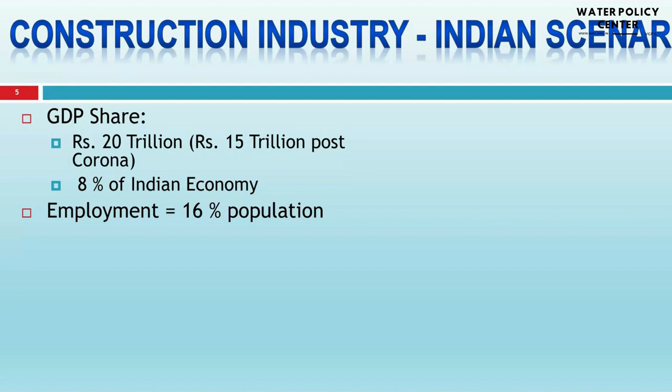But this amount may also change in future, and it is about 8% of the Indian economy. It provides employment to 16% of the population, and it is the biggest job generator next to the agriculture sector.

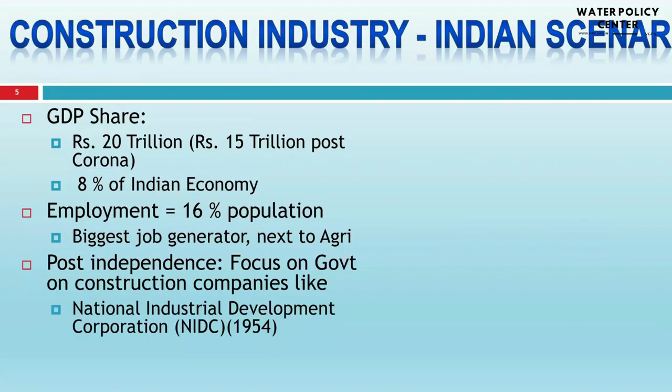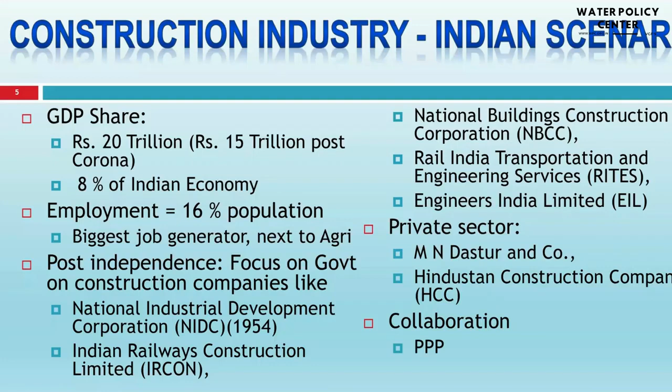There are many incidences in the development of our country, like government set up undertakings and national companies, and there are many private sectors working in this field. There is also a collaboration sector, PPP and BOT, which is a mix of government and private sector.

In this slide, I will briefly discuss the major impacts of COVID-19 on the construction industry. The first major impact faced is a reduction in demand, due to the lack of purchasing power of customers.

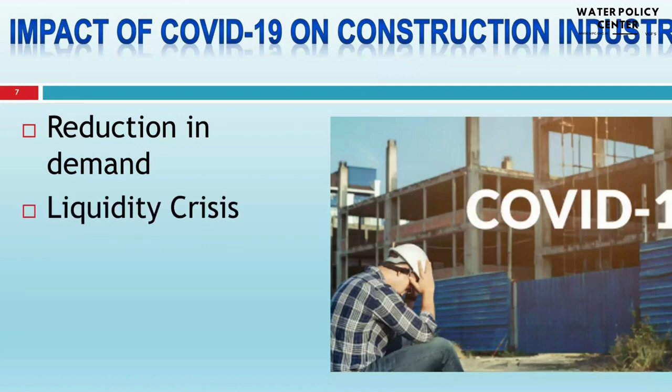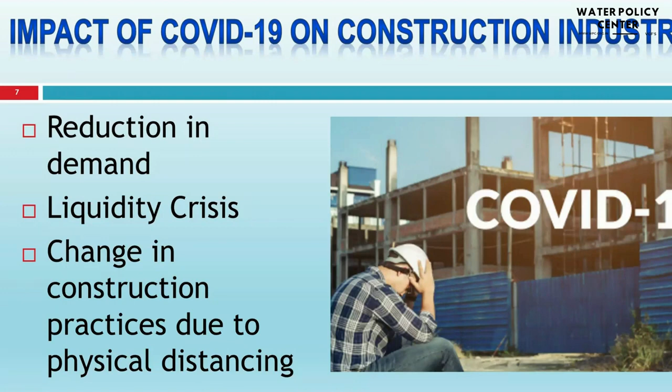Then there is a liquidity crisis, from bank financers to the contractor and the developer. Then there is a change in construction practice due to physical distancing, as many organizations started home working practices, which brought a huge impact on the working of this industry.

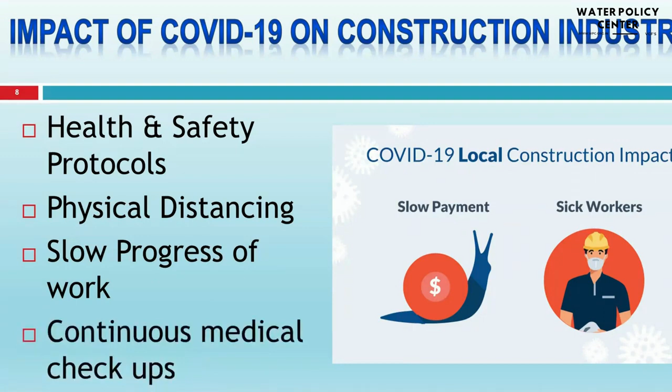If you see the impact on construction speed because of COVID-19, due to the health and safety protocols required at site and the physical distancing norms suggested by the government, the progress of work was very adversely affected. Work progress was very slow, and continuous medical checkups of all workers and supervisors were required to be carried out.

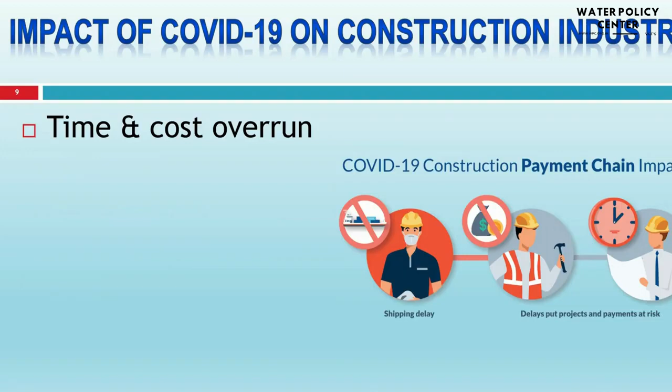These two impacts caused time and cost overruns. So a structure required to be completed within one year was not able to complete in the designated timeline, and this resulted in cost overrun.

This is leading to contractual issues and disputes. There are many contract issues which are also adversely impacting the progress of the construction industry.

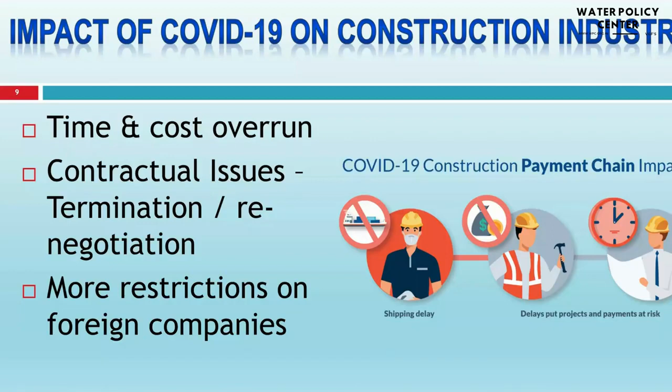For example, for tunneling work or metro construction work, if there is a restriction on imports, development in this sector might be adversely affected. The only positive impact of COVID-19 is that this sector introduced information and communication technology and emerging technology.

As we know, in December or January 2020 there was a first sign of the coronavirus in China. So China started construction of a hospital, and this 1,600 bed hospital was constructed in just 12 days. That is the speed of construction at which this industry can operate.

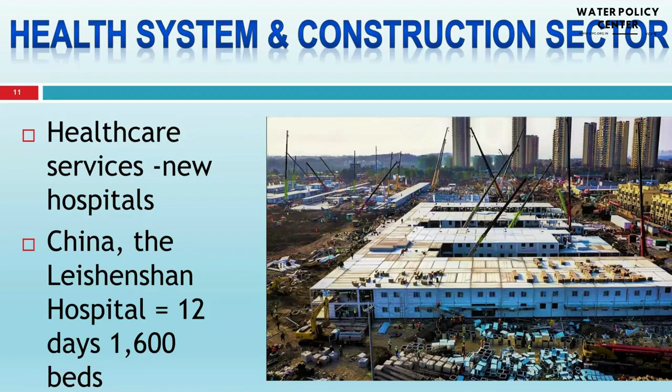In England, the 500 bed hospital was executed in just 9 days. In India, in Mumbai, the 1,008 bed hospital was executed in just 1 month, and in Pune, the oxygen plant was executed in just 11 days, while the estimated timeline for execution of this work was 6 months. So we can imagine that the health system and construction sector move parallel during this pandemic.

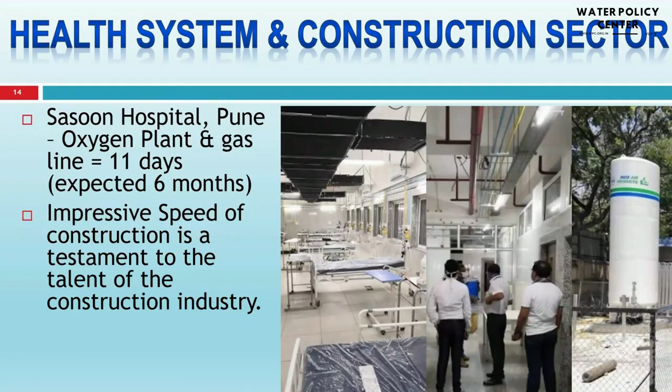This impressive speed of construction is testament that there is talent in the construction industry, and whenever there is a disaster, this industry comes forward and tries to cope up with the adverse impact of the disaster. So in this part, I will try to explain very briefly the emerging technologies being used in the construction sector.

Before that, I would like to elaborate on the 4 industrial revolutions. The first occurred in the 18th century, based on water and steam mechanized production. The second was based on electric power generation. The third was based on electronic and information technology.

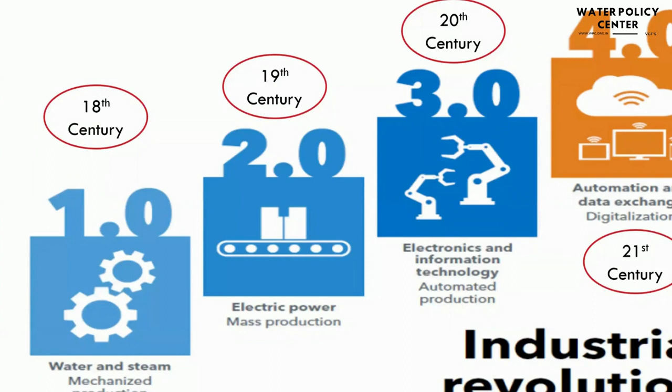And in the present era, the 21st century, we are living in what is said to be the 4th industrial revolution, which is based on automation, data exchange, and digitalization. This industrial revolution will bring some positive as well as some negative changes.

The positive change is that it will improve efficiency, but it will also reduce human jobs. The job curtailment will not happen immediately, and no 100% job replacement will be done by robots or automation, but definitely it will hamper employment.

Construction industry needs decision making at various activity levels, so some employment and some decision making activity will still be handled by humans. This is the last part of my presentation, where I will explain very briefly the technologies helpful in this sector.

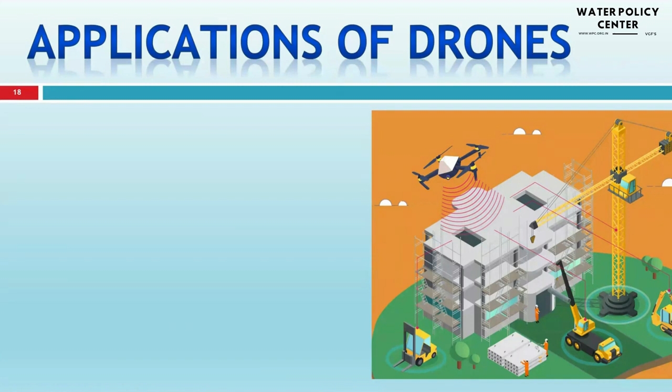The first technology, successfully deployed in the water resource department as well, is the application of drones. Progress monitoring of infrastructure can be achieved through drones. It can also monitor the functioning of machinery at the construction site, where various machineries are operating, and monitor that machinery's health.

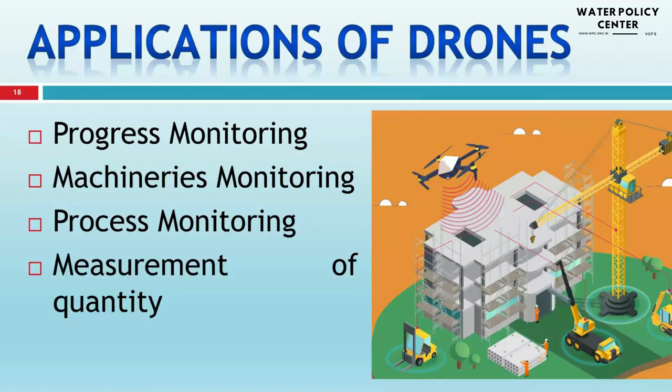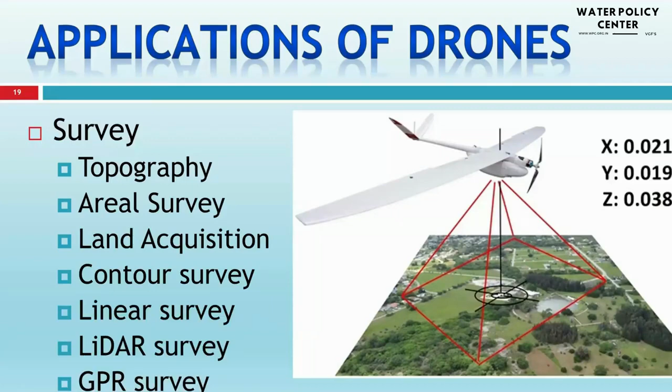Process monitoring, for example concrete mixing, can also be monitored using drones, and measurement of quantity as well as quality can be achieved through drones. Drones are widely used for surveying: topographical survey, aerial survey, land acquisition survey, contour survey, linear survey, and lidar survey. Drones can also generate 3D models, which are very helpful for the planning and decision making process.

Recently there are underwater drones as well. Whenever there is a dam, reservoir, dock, or harbor, and we want to carry out underwater surveillance, these underwater drones are very helpful.

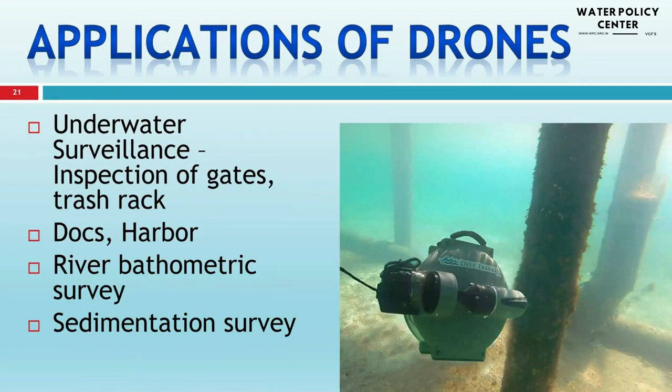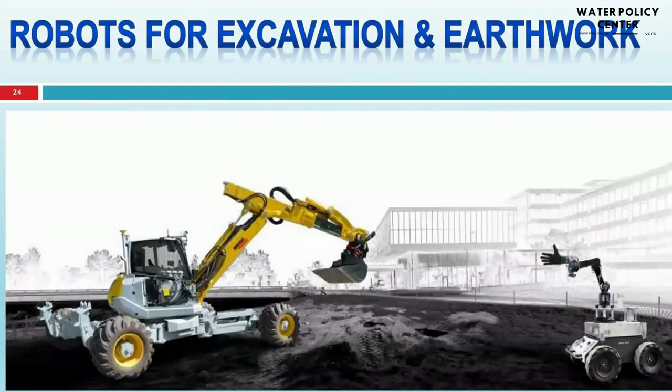There are also robots being used for excavation and earthwork. This robot can be operated using a remotely controlled device.

Then there is automation for bricklaying. This machine can lay bricks once a 3D layout is given as input to this equipment. It is very speedy and fast, accuracy is very high, and it can work 24/7, so mass construction activity can be carried out using such instruments.

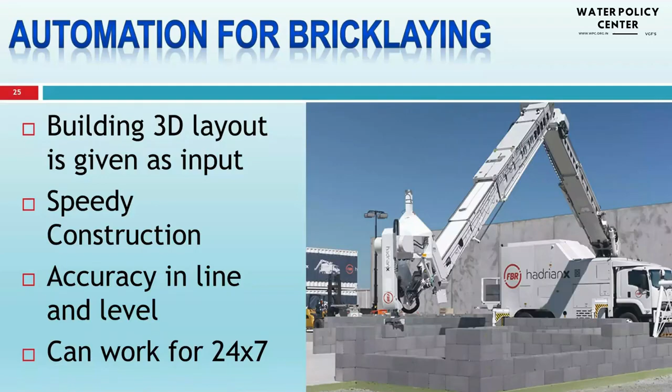There is also automation for reinforcement work, which can lay specific reinforcement in proper order following the bar bending schedule. All the bars are properly joined, and this process is very accurate and fast.

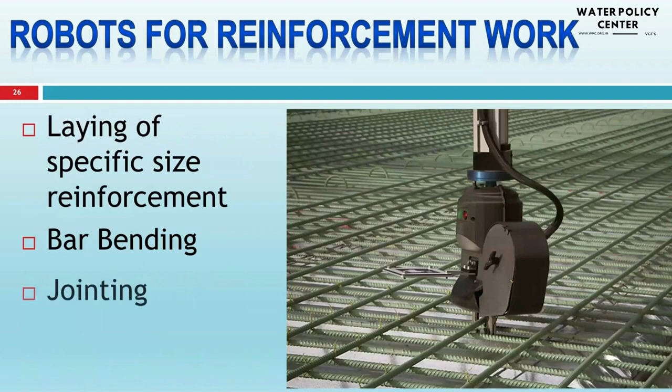And this is the last technology, which brings automation to smaller activities like plastering and flooring. This technology is also widely being used in this sector.

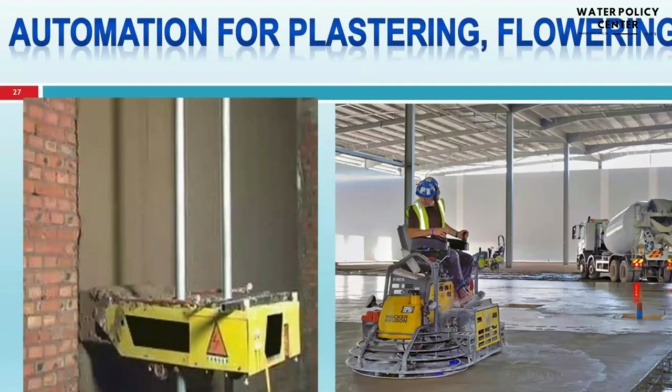In concluding remarks, I would like to mention that the construction sector plays a vital role in development, but due to the COVID-19 epidemic, this sector is severely affected. Considering all the odd things, the only positive is that this sector is ready to adopt new technologies. This journey is tough, but we will overcome this and prosper again. Thank you so much for listening to my presentation.